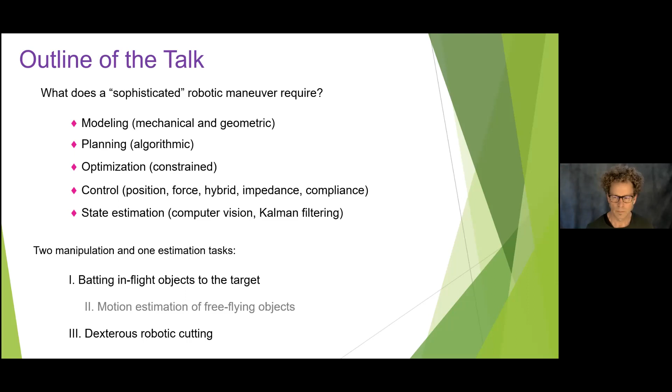Today I'm going to talk about two tasks mainly, which require some sophisticated manipulation skills. What does such a robotic maneuver require? It requires modeling, understanding the mechanics and geometry of the task, and it requires algorithms—Ken used to be a leading expert, and still is, on algorithmic robotics, so I still have a fever for that. It also has optimization, optimizing energy, optimizing time, for instance. But when it comes to execution, especially for contact-based tasks, you have to go through control to exhibit compliance, whether it's position, force, or impedance control. And there's also got to be a good state estimator, either using computer vision or a Kalman filter.

So today I'm going to look at batting and cutting. There's also a derivative task I like to look at, derived from the batting, which is on motion estimation. All right, so this is the batting.

This is work done with former student Matthew Gardner, who's currently working at Boston Dynamics in the Mountain View office, and current PhD student Xiaoqian Mu. We picked this task because we think it's a very highly skillful move, even for a human being who has difficulties, and it challenges both sensing and action. When you decompose this, you see there are so many ingredients: there's impact dynamics, projectile mechanics, kinematics, vision and state estimation, and also planning.

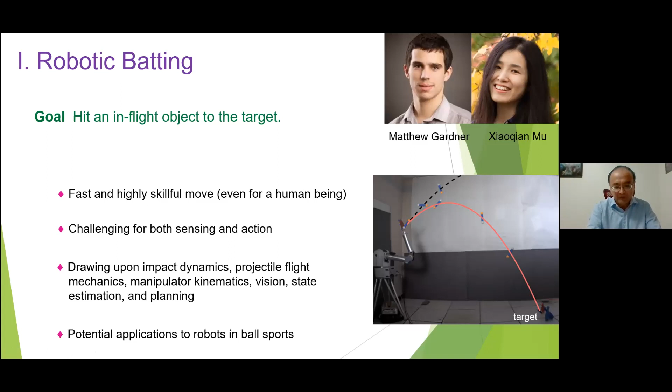And it has some very interesting applications, especially for robots in ball sports—whether volleyball, soccer, through impact, or ping pong. So this is the system architecture. If you focus on the left side, there's an object flying towards a robotic arm, and there's a camera, a high-speed camera at 150 frames per second, capturing these images and sending them to image processing, which triggers the state estimation to get the velocity and angular velocity currently. In the meantime, the planner will anticipate at a certain time instant the bat, which is fixed on the robotic arm, to meet the object and bat it.

The rebound trajectory has to get to a target. State estimation results in, at a particular time instance, the pre-impact velocity and angular velocity. The arm is moving as well because it's very fast, only about 6 or 7 tenths of a second, and it has to meet at that point. Then the impact will predict the rebounding velocity and angular velocity, and at that point it's all open loop.

The object has to fly, and we're using projectile mechanics to characterize the lift forces, Magnus forces, and drag forces. It has to go through that target, so that's basically used as a constraint, which is employed by the planner to generate the pre-impact joint angles and joint velocities of the arm at that particular time instant.

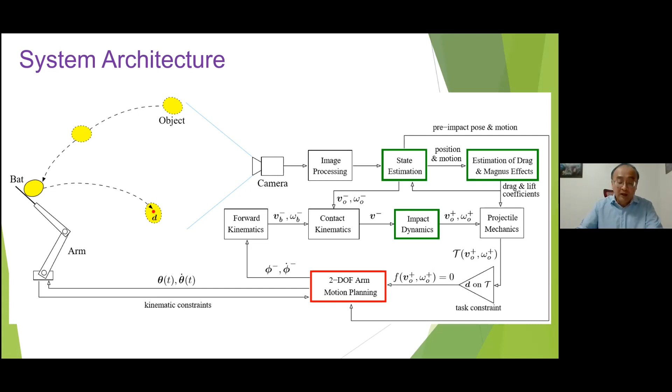The arm is moving right away, and then better state estimates are obtained, making dynamic adjustments. So there's a lot of work involved here.

Since we're running out of time, I'd like to skim through it. There's great work by Newton and Poisson, so there's kinematic restitution, kinetic restitution, and energetic restitution, which is the only one consistent with energy conservation. There's work done by Darboux, Routh, and Ken's PhD advisor Matt Mason, and Yu Wang, a former student, and also Berkeley colleague Canny and former student Mirtich.

There's also impulsive manipulation, where they're using electromagnetic forces, using an air table to orient objects, and doing batting and tapping, orienting as well. And recently there's interest in catching flying objects.

There's also some work on batting, except they're only interested in batting the object regardless of where it goes after impact. And in table tennis, from Anderson's first robot playing table tennis to Dr. Sheng and Zhejiang University's robots, two humanoid robots that hold the record of a rally with over 170 shots.

So to solve this impact problem, we started with 2D. The object's flying in the plane with this equation. When you look at the contact velocity, its change is actually represented as the product of the inverse inertial matrix with the impulse.

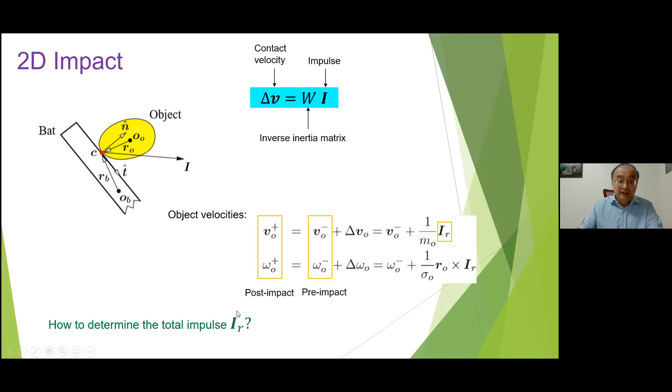The issue is how to determine the total impulse. We have the impulse in the normal direction and tangential direction, and the contact velocity decomposed along the tangential and normal directions. We do this case-by-case analysis, like what Matt Mason and Yu Wang did, and look at several critical moments where compression ends and restitution ends, and when the tangential contact velocity becomes zero.

What we did differently is use energetic restitution. We track the energy: compression ends when the normal contact velocity becomes zero, but restitution ends when all the energy gets released and converted back, or dissipated after some dissipation, converted back to kinetic energy.

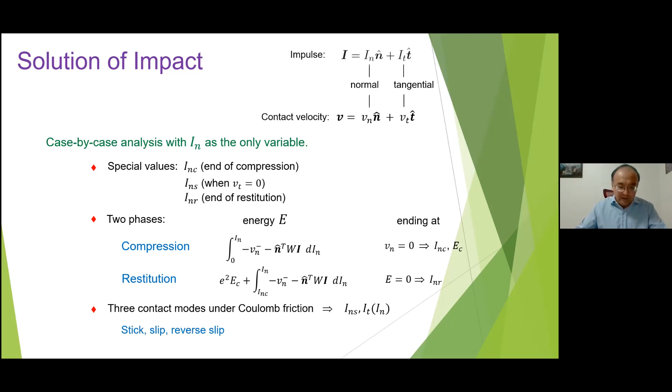So there are three contact modes: stick, slip, and reverse slip. Here the variable has only one variable, which is the normal impulse, and the tangential impulse is a function of this variable. You just let this impulse accumulate, and check this critical moment, and in the meantime track the energy.

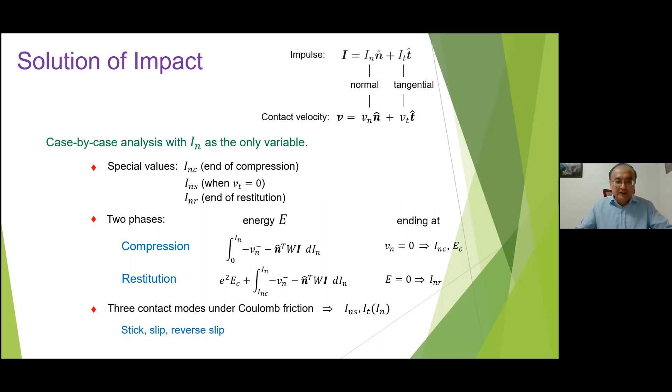So there's the impulse at the center, the contact velocity, and the energy. The energy is varying, and the relationship is that the impulse changes the dynamics of the objects in impact, changes the contact velocity, and under Coulomb's law, there are different contact modes which in turn govern the change in the impulse.

The questions that haven't been answered in the history of impact are: people say we have restitution, then we have Coulomb's law—are they consistent? Will the compression end? Will restitution end? So we give a proof that the impact process as modeled will end—it may not run into a situation where two objects are actually penetrating into each other forever.

Add to that, after the impact the object is in free flight, and there's air drag, and also Magnus force. So for those of you who play soccer, you know this banana kick, right?

So when the ball is actually rotating, if it has forward spin, it's gonna go down earlier than expected. If it has backward spin, it's gonna travel longer. This is all because the speed of the air on the top and bottom of the ball are different. So with backward spin, the top is actually faster, and the bottom is slower.

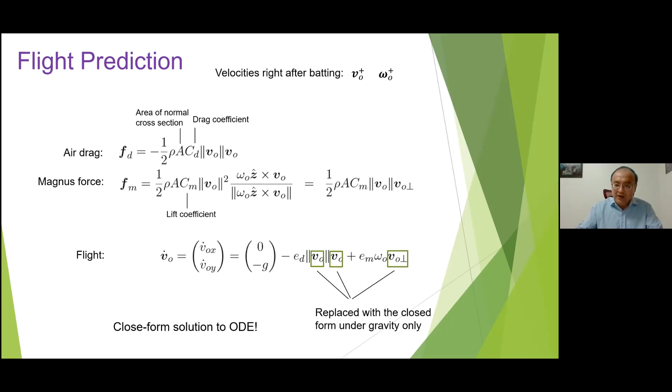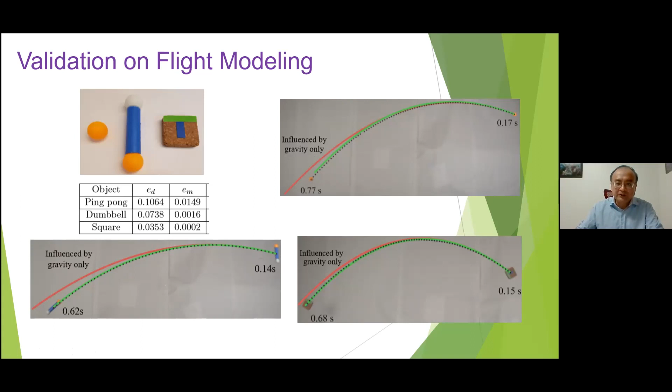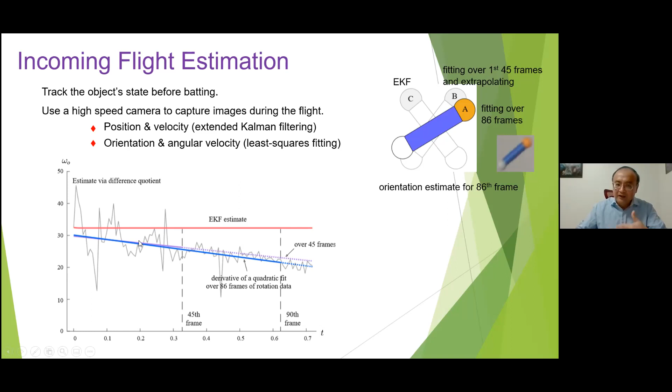We really want a very efficient way of modeling this. Then there's the flight estimation. I'm gonna skim through this because I'll spend a few slides later talking about flight estimation. We basically estimate the position and velocity using an extended Kalman filter, and for the orientation and angular velocity, we decided to do the least squares fitting. There's enough speed to keep up with the flight.

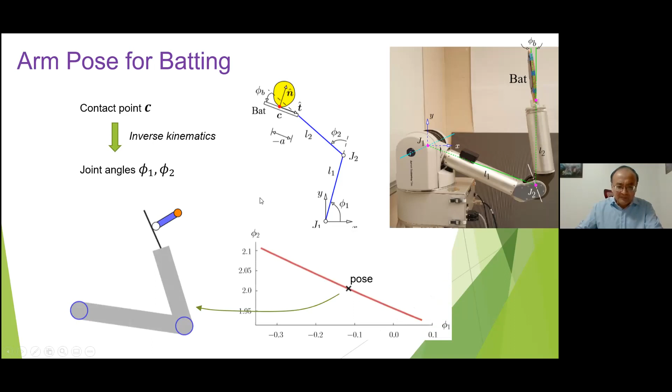Okay, so for the arm, if you look at the instant of impact, there's the contact point, and through inverse kinematics that actually imposes a constraint on these 2 joints. Unfortunately, we have only a WAM arm with 4 degrees of freedom, which can only afford 2 degrees of freedom in a vertical plane, which is the plane of the task. So that imposes the constraints, and there's a dependence here.

What the planner needs to do is plan the state of the arm right at the time of batting, which includes 2 joint angles and 2 joint velocities. When you write out these constraints, including the task constraint, the contact constraints, the ranges of joint angles and velocities, and the impact feasibility, there's also the realizability, because can the robot move fast enough to get there, reaching those joint angles and joint velocities? So there's a realizability.

Constraints which are formulated in first order logic formulas that can be tested very quickly. Okay, so there are like 16 constraints, and 2 of these are equality constraints that allowed us to eliminate 2 variables. Now here is the planning cycle.

Every cycle starts with the acquisition of a new image and ends with the acquisition of the next image. As soon as an image is acquired, the arm is already in motion, so it has to move right away. There's about 3 milliseconds we leave, which is a conservative time, enough room for image taking, processing, state estimation, and planning, and then sending the command to the robot. The trajectory now gets modified dynamically by the arm right at this point, and then it just goes through until the next cycle. So it just keeps updating.

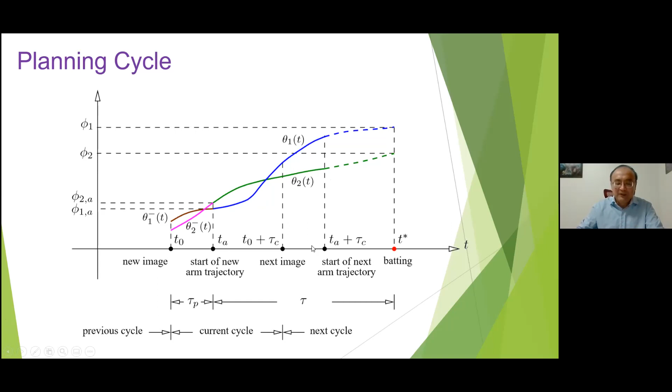We use 2 cameras, and because this is the planar task, we actually printed a big screen and did the calibration. It's in the plane, so we can do it very precisely and accurately. Then we use the launcher, a catapult, to launch the objects except for the cork. So now here's the video.

Okay, so the first set of experiments is about batting ping pong balls. We have these squares hanging over the ceiling, randomly positioned. For one position, there's only one bat. It fails, then it fails. Then it succeeds, and succeeds.

The dumbbell thing is more interesting. It's flying, and there are 3 toy bowling pins, and the dumbbell is trying to hit that, batting, after batting. This is the miss. This is really hard, and I'll talk about this comparison with performance between the robot and a human subject.

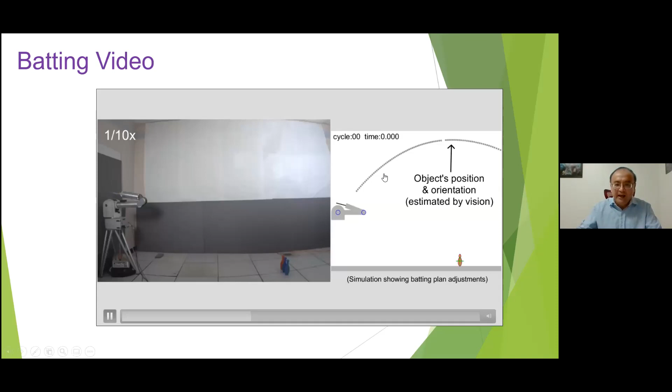So what happens if you put this side to side, the video and the planner? It's flying, now into the zoom, into the scope of the camera. The arm is moving, making minor adjustments to its trajectory, trying to meet the dumbbell at the point with the right angular velocity and joint angle.

So the cork one is tough. We didn't use the catapult, so Xiao Qian is throwing it, and these two are misses, and the third one was a success. The success rate is actually not that high, but it would be very difficult for a human being as well.

This is all in one take. For the ball, it's easy because the aerodynamics is more accurate. We're not doing the full modeling of the aerodynamics.

So these are all, now it starts to fail, and it fails again. And then one more bad one. There's another one.

So the final one I'm going to show is we're just batting it towards that cross. On the floor there's a big sheet, and these concentric circles help us tell how close it is to the center of the target. If it's outside the big circle, it's regarded as a failure.

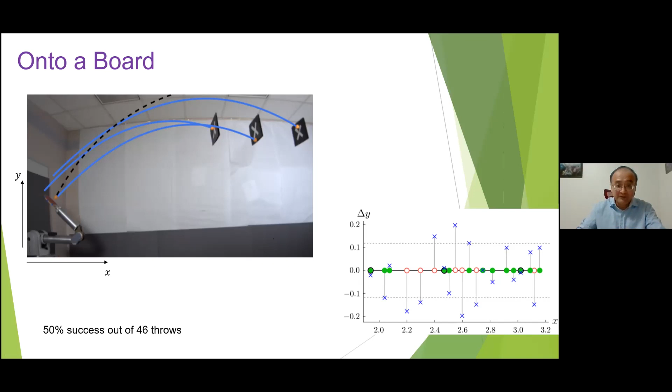It's a 50% success. But for the bowling pin, the success rate is very low, about 15%. We've done a lot of these trials. Here's one set, that's 20 of them. This is one of the better sets we have, and there are 5 successes.

Basically when it's knocked down, it's a success for the bowling pins, even if it's just one of them. Now we asked Xiao Qian to do the same. She didn't go through any practicing, so she was trying to do that.

We placed these bowling pins, the row of bowling pins, at exactly the same locations on the floor. This is the x-axis. She succeeded in 4 of them, and she's actually doing better.

I think if Xiao Qian keeps doing this, eventually she would beat the robot easily, because humans learn, right? You practice more and you get better, but ours, we don't have learning in this.

Okay, for the net, the success rate is about 25 out of 37. This is tough. The cork and the dumbbell, some of the failures are because they do not stay in that plane.

They actually swirl out of it a little bit, and the robot would have a wrong estimation, and the impact would drive it to a different place, out of that vertical plane, not to mention missing the target.

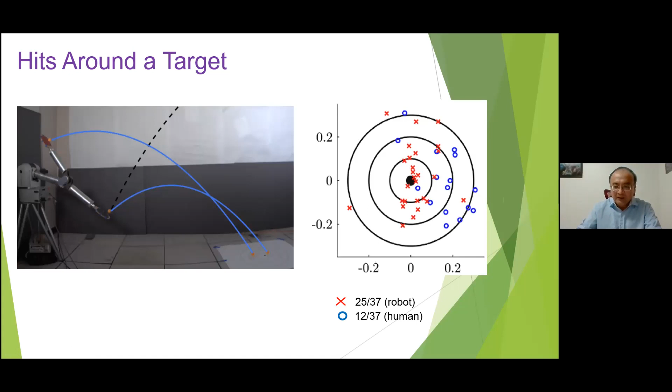You see that she had a bias, she tended to bat it towards the right side. But the robot actually did better, and obviously better than Xiao Qian on this.

That was Matthew, when he started his PhD, he was working on this batting with me. Then we wanted to do 3D batting, and one of the obstacles we had was to do the motion estimation, so this is full 3D, and Matthew got attracted to that. He ended up spending the remaining 3 years of his PhD working on this problem, and never had time to come back to batting again.

So we had this object that is flying, and we have 2 cameras. We are going to use epipolar constraints, and some of you may already know this. So here is the diagram.

We have 3 blocks: the aerodynamics block, the constrained Kalman filtering that does the estimates, and then the feature tracking that is graph-based.

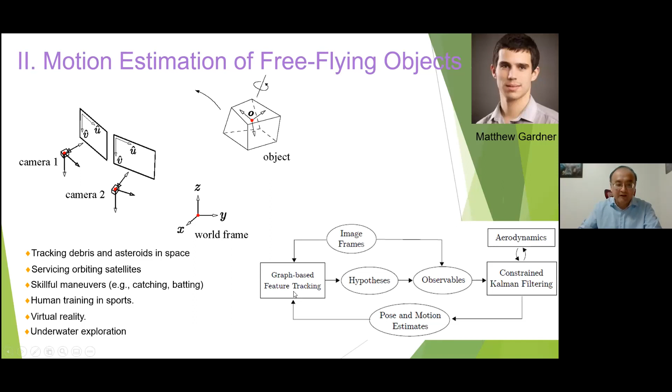There has been a lot of work from computer vision, but it's mostly not flying motions, and involves slow translation with linear velocities. You can also use a kinematic-based approach by embedding accelerometers or magnetometers inside the object and using kinematics to calculate velocity and accelerations by solving equations. Then from aerodynamics and aerospace engineering, they use aerodynamics and try to model these effects more accurately.

Kalman filtering comes from the original work by Kalman, and then there's extended Kalman filter and unscented Kalman filter, and their applications to estimation. Recently there has been some work on using VINS for combined vision and Kalman filtering.

For constrained Kalman filtering currently, to our knowledge, it has only been limited to a single constraint. So we've done some work on that.

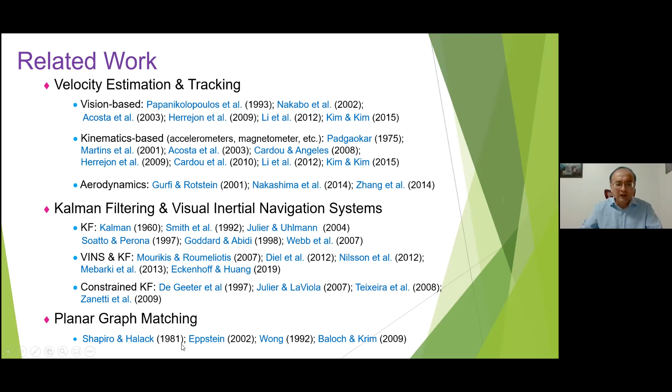For feature tracking, there's actually the planar graph matching work by Eppstein, which is a polynomial time algorithm. But when you allow tolerance and errors, then it becomes NP-hard.

So you get these forces, and then you plug into Newton's and Euler's equations, and then you update the velocity and angular velocity. Now through the Laplace equation for velocity, you generate the velocity potential, and then get a gradient, which will contribute to part of the air velocity surrounding the object.

So there's a volume of air surrounding the object where the velocities of these air elements are changing as the object is flying. And then the angular velocity would contribute to the Magnus effect.

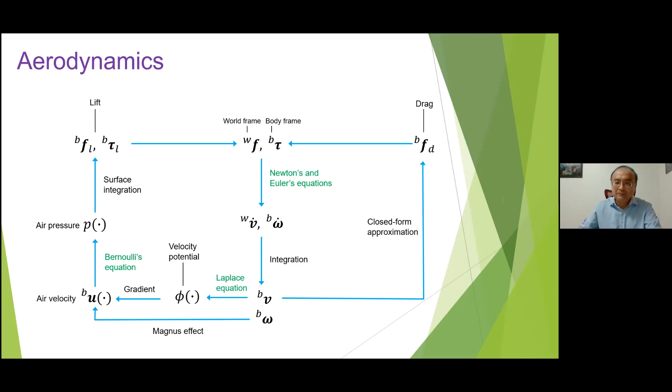So when you plug into Bernoulli's equation, you get the air pressure. And when you integrate the air pressure, you get the lift force as well as the torque. Then in the other direction, using the velocity itself and an experimental closed-form approximation, you can get the drag forces, which are actually pretty reliable. It depends on the cross section, which is perpendicular to the velocity direction.

So the state variables are the object's mass, center of mass, and then the orientation, velocity, angular velocity, camera orientations, and camera's focal points. So there are 27 of them.

Now we have the system written out by combining the dynamics with the camera projection. And we constructed an extended Kalman filter, the EKF, subject to 3 constraints due to 3 quaternions describing the orientation of the object and the 2 cameras.

In the previous work, we've done a survey and haven't found any work that handles more than 1 constraint. But this is not that difficult, it just requires some algebraic manipulation using the Lagrange multipliers.

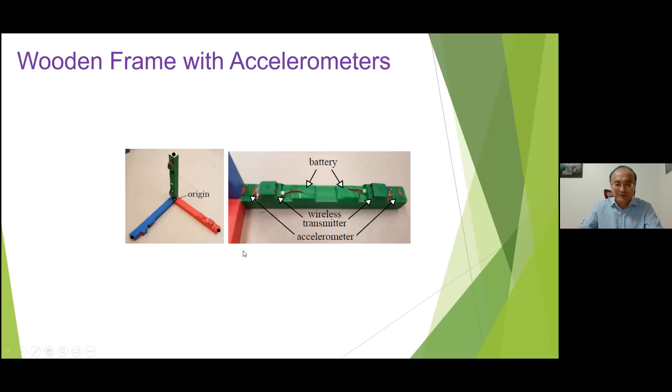Initially they have some differences, especially in the x velocity, but gradually it just converges. Okay, so that's not enough.

Matthew, with Xiao Qian's help, worked on the rugby ball, throwing it. Now we have to take into account the aerodynamics.

The reason is that the rugby ball is actually light, so the aerodynamics effect is very obvious. With the frame object, though, because it's heavy, the aerodynamics effect is negligible.

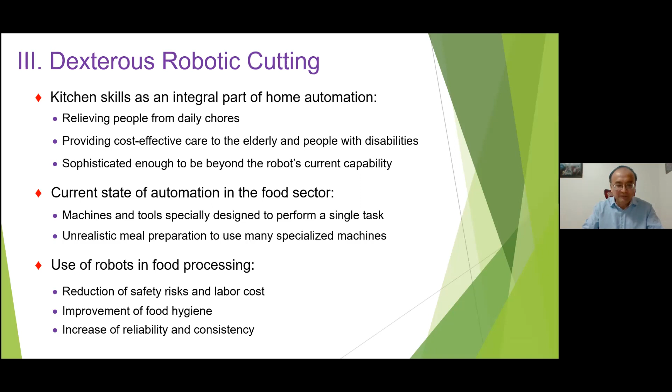But currently, in the food sectors, we have lots of machines for deboning chickens, cutting noodles, each one for a specific task, so they're not modular. If you're going to have all of them in your kitchen, you'd need a huge kitchen. But then where's the skill? These ones do not require skill because they're designed that way—they're machines, they just mind their own business.

So we thought it would be cool if we could have a robot that demonstrates cutting motions as natural and smooth as the motions by a human chef. So Xiao Qian and Yue Chuan worked on this problem with me.

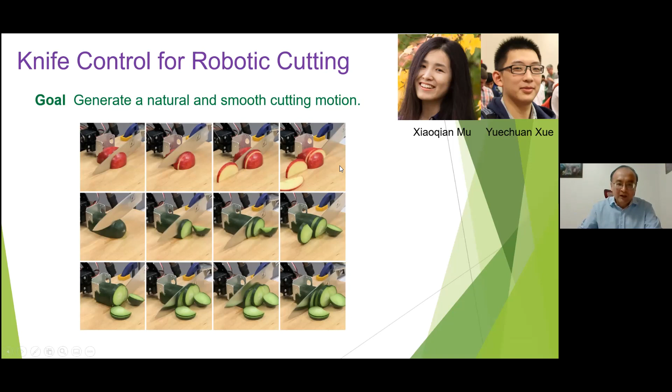We still need modeling, and the modeling tool comes from fracture mechanics. There has been some work from the robotics community on cutting of biological tissues, but these methods are mostly ad hoc, not strictly based on mechanics—in part because these materials are soft, and if you follow mechanics rigorously, it gets a lot of nonlinearity, making it a daunting task.

And then we need to do the control in order to exhibit those compliant motions. So you go back to the work by Raibert and Craig on hybrid control, Hogan's impedance control, and Khatib's operational space control—these are the foundational ones. Now people are applying these control measures in cutting, and recently there's been interest from the machine learning community to apply data-driven approaches to learn the best cutting force and the best cutting trajectory.

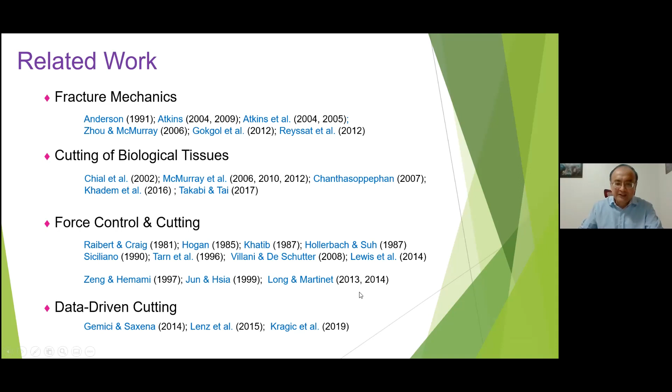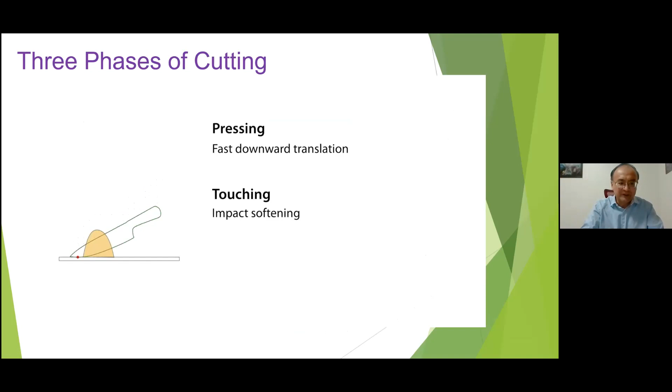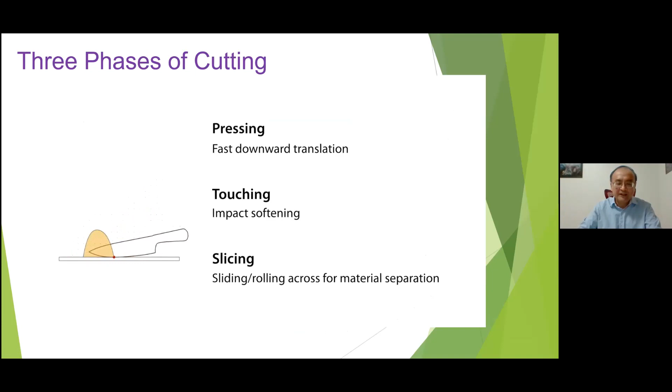Okay, so when we look at the cutting, we actually decompose it into three phases. First, we translate the knife downwards until it makes impact. This is fast motion, so there's an impact that needs to be softened. This impact is between the knife and the cutting board. After that, it slows down, and the knife slices through the object—that's the third phase. The second phase is very brief, about 1/10 of a second, slightly longer than that.

But if you look at these three phases more closely, the contact the knife experiences is changing. In the pressing phase, it's the contact between the material and both sides of the blade. For this, we can use position control—we can just let the knife translate, or if we want it to rotate, that's fine.

But in the touching phase, there's blade-material contact, and there's also the knife and board impact, so there's an impulsive force we need to mitigate. Here, the best control strategy is to apply impedance control in the vertical direction to soften the contact, and in the horizontal direction we want to stabilize it, so we can use position control.

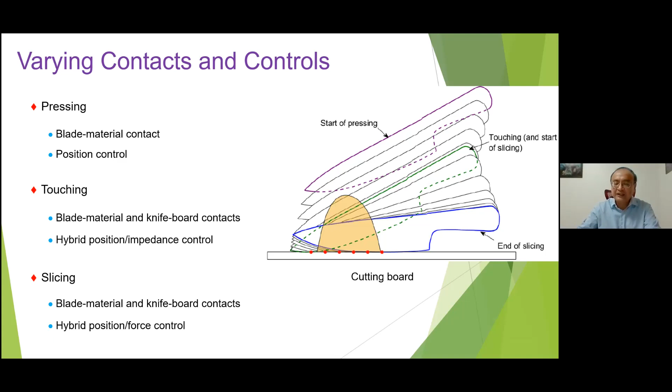Then the last phase is slicing, where we want to cut the object completely. So we've got to make this red dot, which is the contact point between the knife and board, move across the bottom of the object. That naturally requires hybrid control. We maintain some force on the board to ensure the object is cut open as the knife moves through, and position control is used in the tangential direction to drive the red dot from the left side to the right side.

But sometimes the strain energy can be negative, meaning the built-up strain energy actually contributes to fracture. It may also generate kinetic energy, and the knife needs to overcome the frictional force between the blade and the material.

Because this is the beginning of the project, we made some assumptions: the knife moves in the plane of symmetry, which makes sense for most cutting actions. We wanted to focus on the cutting, not stabilization of the object, so we used fixtures on the object to keep it stabilized.

And there are plenty of objects that undergo negligible deformation during cutting, so the kinetic energy and strain energy are both zero, which also gives us the benefit that the cross section is invariant during cutting.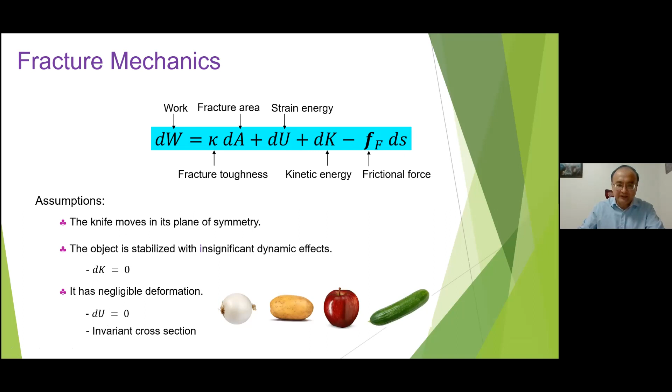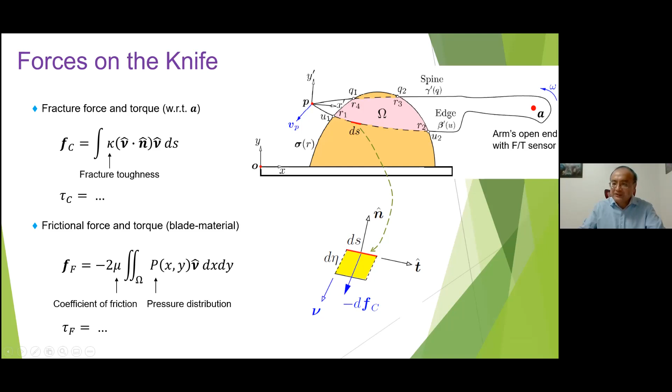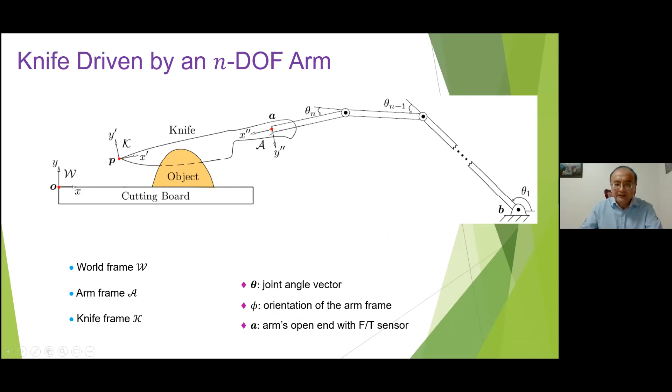So the end of the handle of the knife is attached to a robotic arm. There's a force torque sensor here. If we put the arm in, now we have three frames: the world frame, the knife frame, and the arm frame. There are joint vectors and orientations of these frames, and here at point A is where the force torque sensor is mounted, basically at an open end.

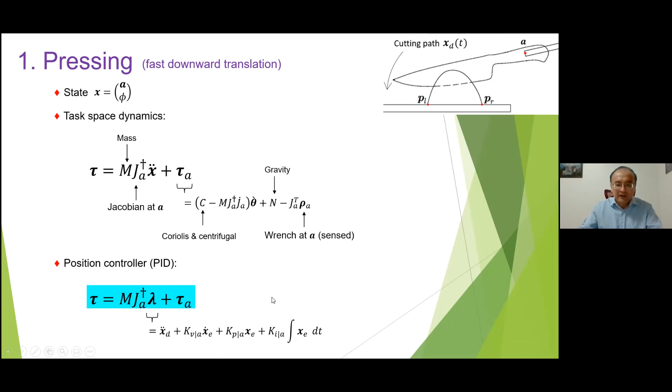For pressing, it's pretty straightforward—we can do position control, work out the dynamics, and write it in the task space. You have the Jacobian JA of point A, and all the Coriolis, centrifugal, and gravity forces, as well as the torque and force exerted by the material at point A, which we can sense using a sensor there. So you replace this X double dot with a servo, giving a third order linear time invariant system, and you can choose these things to achieve stability.

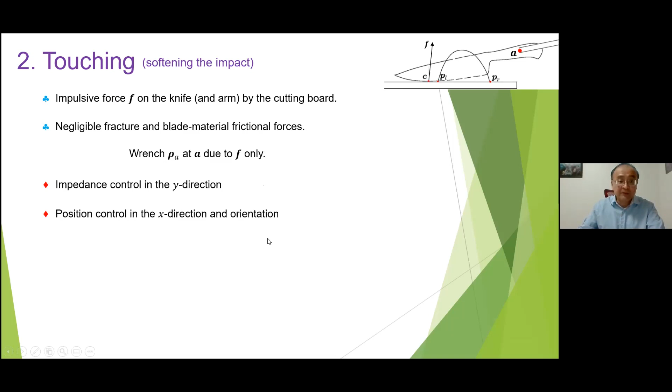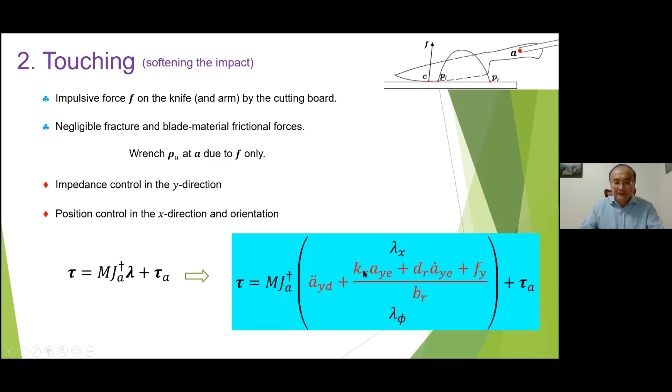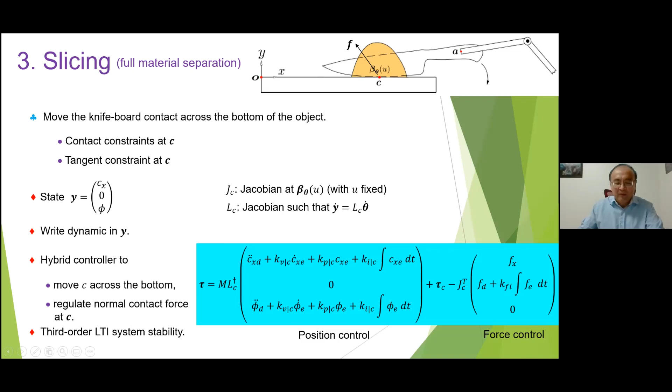We can prove the stability of the system as well, although it takes a little bit of effort. The nice thing about the third phase is that you can actually set the desired trajectory of C, as well as the orientation of the knife, to translation, which maps to slicing.

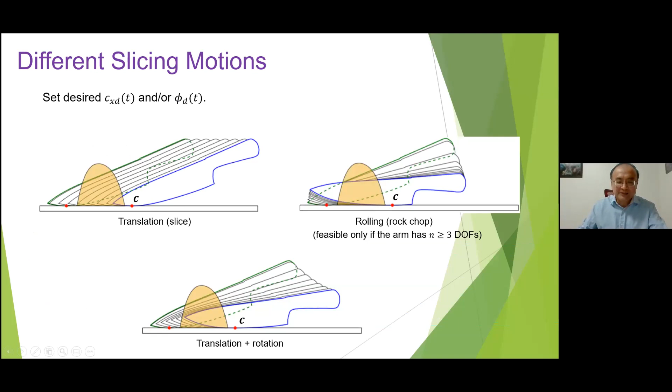And you can also do the rock chop. If you let the knife just roll, you get the rock chop, except this requires the arm to have at least 3 degrees of freedom, which our arm doesn't have — in that cutting plane it only has 2. So you can just have a mix of translation and rotation.

We also handle real-time estimation of the physical parameters. If you look at the three phases, what constitutes the sensor reading in the pressing phase is the cutting force, the fracture force, and the frictional force. The touching phase reading is the impulsive force.

And the third, slicing force — this is the part that requires modeling, because we wanted to regulate the normal contact force on the cutting board while the knife is slicing through the object, to make sure it's actually slicing through. So we've got to know the cutting force and the frictional force.

And the thing with real objects is that all the fruits and their values vary with knife sharpness and temperature, and with individuals of the same type, or even freshness — the fracture toughness changes, the friction changes a few days later after you take it out of the fridge. But we made some assumptions, and we actually have a way of dynamically estimating these parameters while cutting is going on.

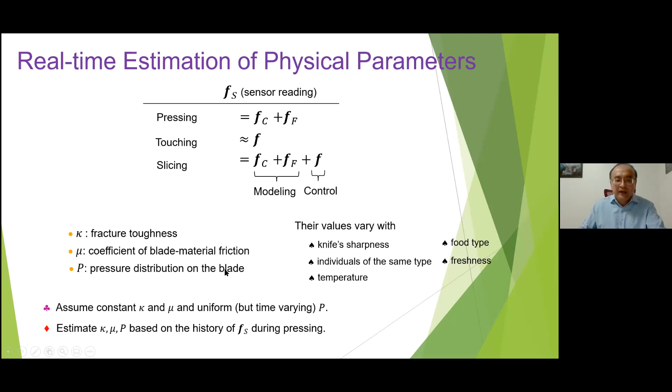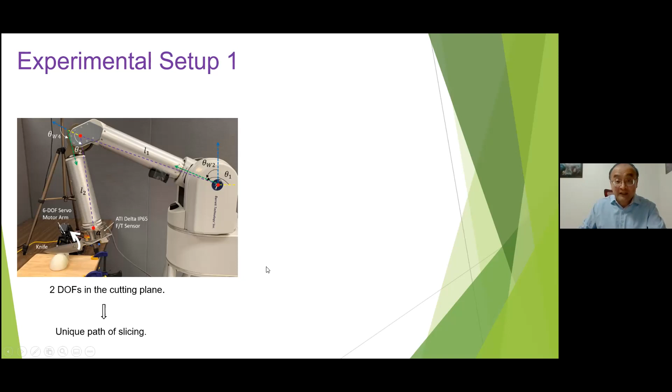So the first experiment was set up. We have this cheap $200 arm just to fixture the object — it cannot do torque control, and it's very inaccurate. So the WAM arm, the same WAM arm that does the batting, is doing the cutting. Because of lack of degrees of freedom, it has only a unique path when the knife is in contact, during the slicing phase.

So these are the results, I'm going to show a video a little later. The desired trajectories are the dashed trajectories, the real trajectories are the solid trajectories. Before slicing, we're just looking at the lowest point C and the Y coordinate; after slicing, the X coordinate at this point has to move across the onion, okay?

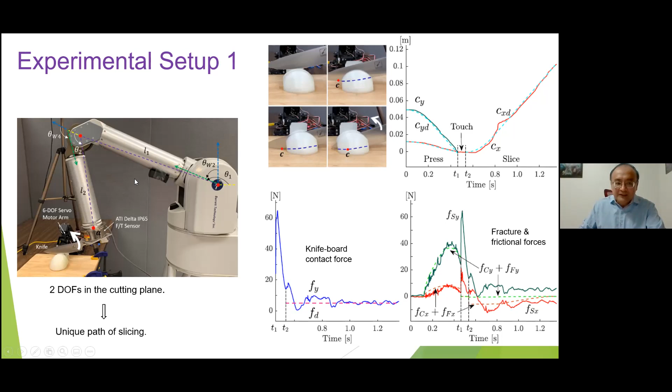And the contact force during slicing is regulated at 5 Newtons, and then you have the fracture and frictional force that are modeled. One thing is that the modeled forces during slicing are very, very small — the fracture and frictional force. This is actually due to the lack of that one degree of freedom that prevents the knife from rolling on the board, so we had to compensate for this.

So we made a linear guide just to translate this cutting board, and calculate the right speed of the contact point movement, to make the relative contact velocity as close to zero as possible, which is shown here. By doing this, though, we do see an apparent increase in the cutting force and also the frictional force — so this is why we need modeling now.

With the two degrees of freedom, we can barely do that. So now this cutting force is actually huge — it starts with 30 Newtons.

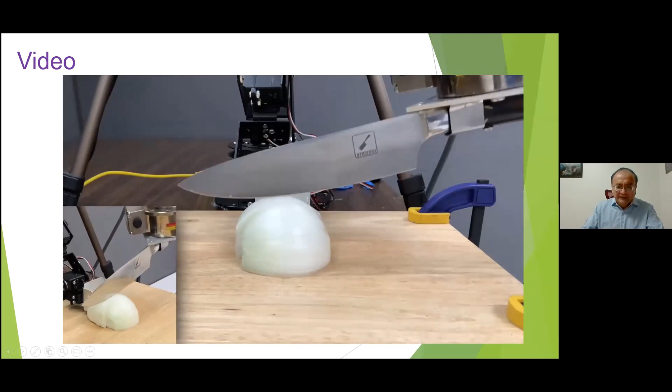All right, so now this is the video of cutting the onion. So it's repeated — that's setup 1.

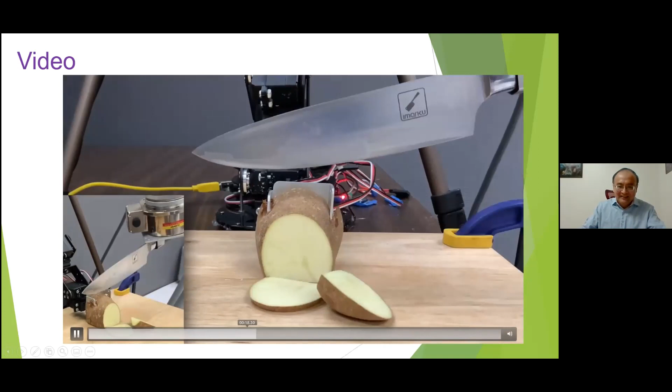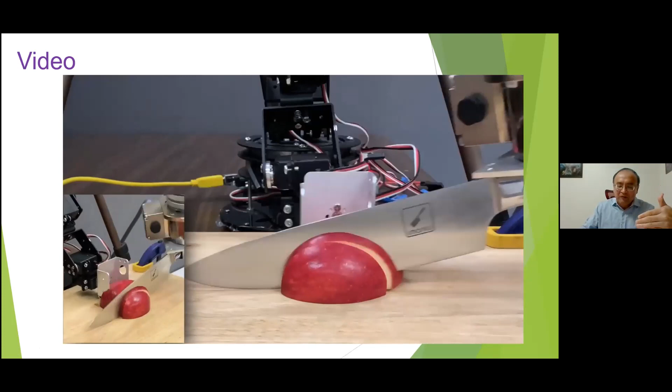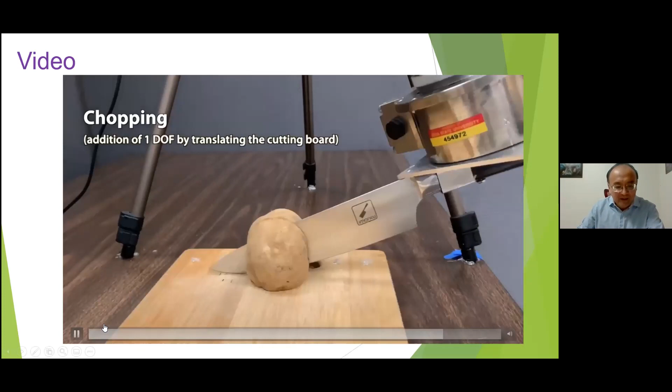Okay, and potato. It's getting a little tedious seeing this repeated cutting, but if you look at the motion, especially the slicing phase, it's very soft. The whole cutting action lasts slightly over one second, and it's actually compliant—it rotates a little bit. This is the chopping motion. The translating linear guide makes up for the lack of degree of freedom, and makes the whole action look like chopping.

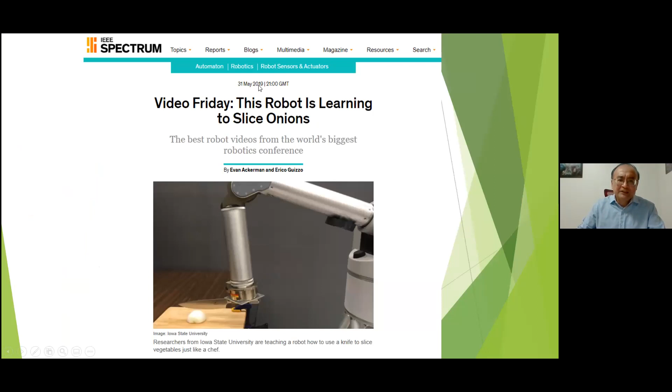I'd like to mention that the older version of this video was actually featured on May 31st, 2019 in IEEE Spectrum News on Robotics.

So there are some future directions for 3D batting. The computation is a big issue, and we can also work on compliance, because letting the ball stay with the bat longer with the object is what happens in tennis and soccer—there's a more tangential impulse that can change your trajectory more dramatically.

The estimation and planning can also be a big hurdle. Matthew was only able to do the estimation, but it's still not real time. For dexterous cutting, one of my students and I have been working on modeling of different deformable cutting, as well as work optimization, minimization, and path planning, just to make it effortless.

How do you characterize the energy expense of the knife, or the energy expense of the robot? There's also coordination between the cutting hand and the holding hand—how do they talk to each other, communicating through force interactions? We can also look forward to composing multiple basic cutting skills, like chopping and slicing, to do more complicated ones such as dicing.

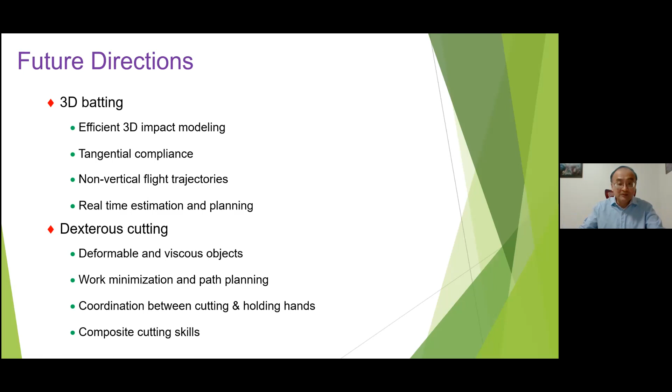So I'd like to end this talk with an acknowledgement of the two grants that funded the research presented here. I'm happy to answer any questions you might have.

Excellent. Thank you, Yanbin. Two great projects, and very interesting—especially the cutting is something I've never seen before.

I think everyone has questions, but if you don't mind, I'll jump in. The first one has to do with the 2D plane for the batting—I'm curious because, as you said, the degrees of freedom of the arm are limited, it's a 4 degree of freedom arm. So how do you launch the pitch, if you will, to the bat? What is that process? You mentioned it, but it went by kind of quickly.

You mean the batting one for the bat, right? Yeah. So as soon as the object takes off, the arm starts moving, and it has an anticipated time of collision, the bat colliding with the object. It plans according to that, but as frames of images come in, it gets a better estimate and modifies. We use a polynomial—this is a good question—we use polynomial interpolation, using the Craig stuff just to change it.